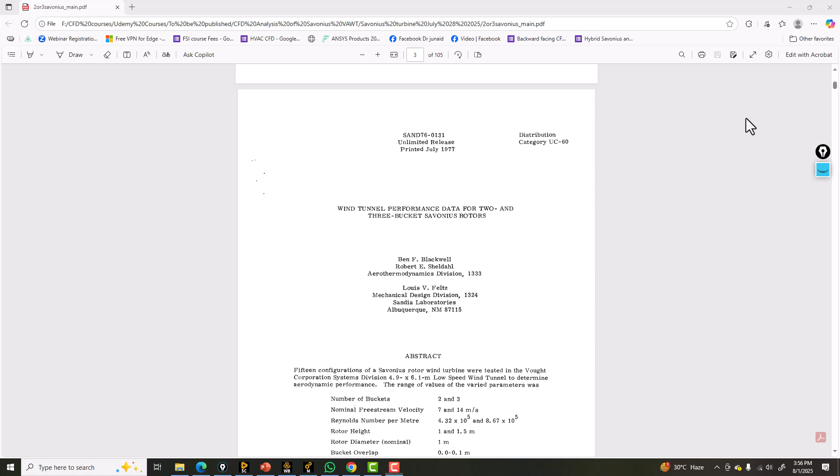For the Savonius turbine that we are going to consider here, the dimensions are given here and they are taken from Blackwell et al. And you can see the report: Wind tunnel performance data for 2 and 3 bucket Savonius rotors. And if you go through all this information, you can see the speed is 7 and 14 meters per second, and rotor diameter is 1 meter, not exactly 1 meter, and the bucket overlap is 0.0 to 0.1 meters.

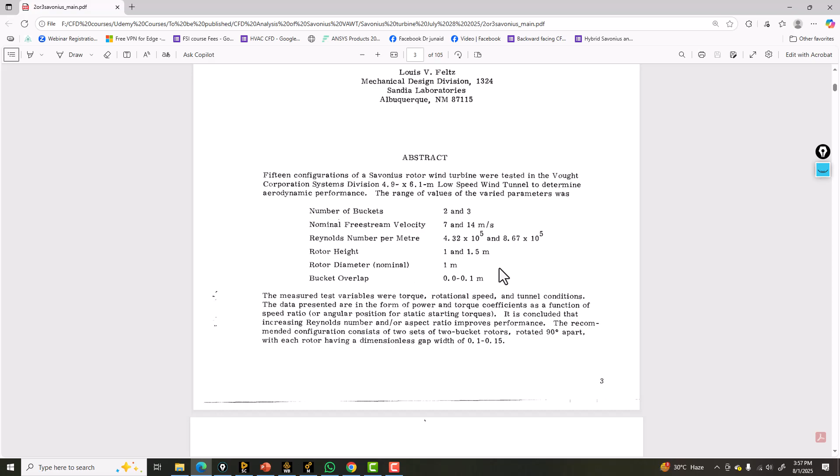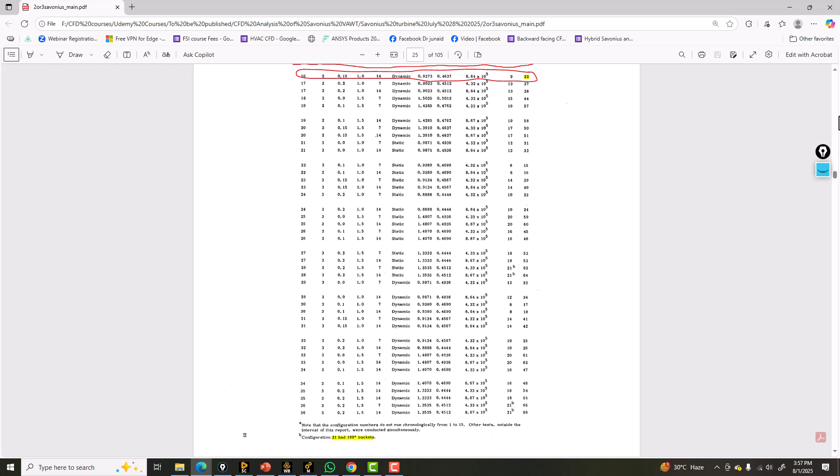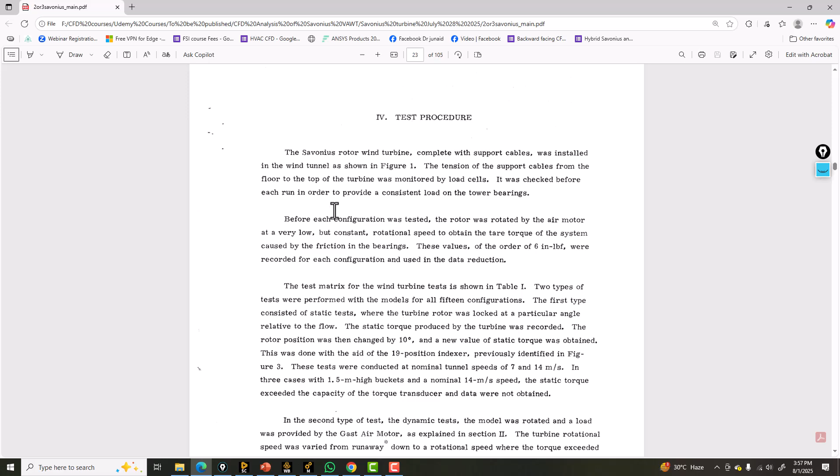Okay, so let's go to more details here. Here is the picture that I was showing you in the previous slides, and the data that we are using is given here. So test number, it's figure number 16, the run number is 21, 22, and configuration number is 9. And the gap S by D ratio or overlap ratio is 0.15. Height is 1.0 meters. We are not taking the height right now because it's a 2D case.

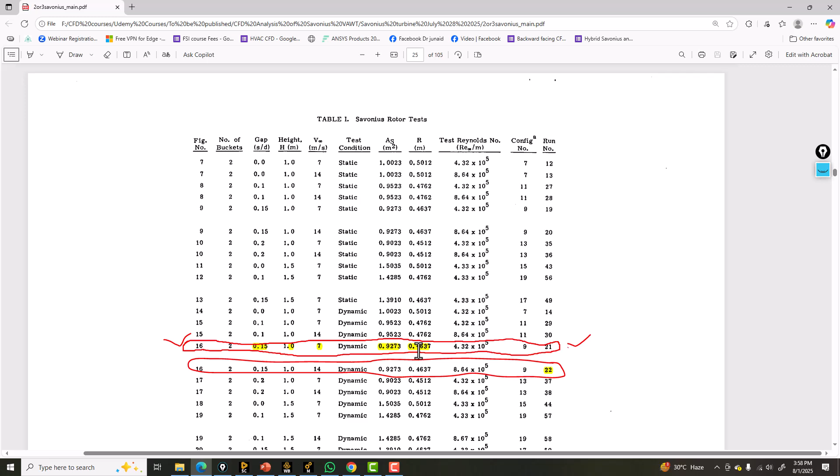And velocity we are going to consider is 7 meters per second, and the area is 0.9273. It means that the area for the Savonius turbine is diameter into height. So if the height is 1 meter, the diameter would be 0.9273 meters, or 927.3 millimeters. And the radius would be the half value, and Reynolds number is given here.

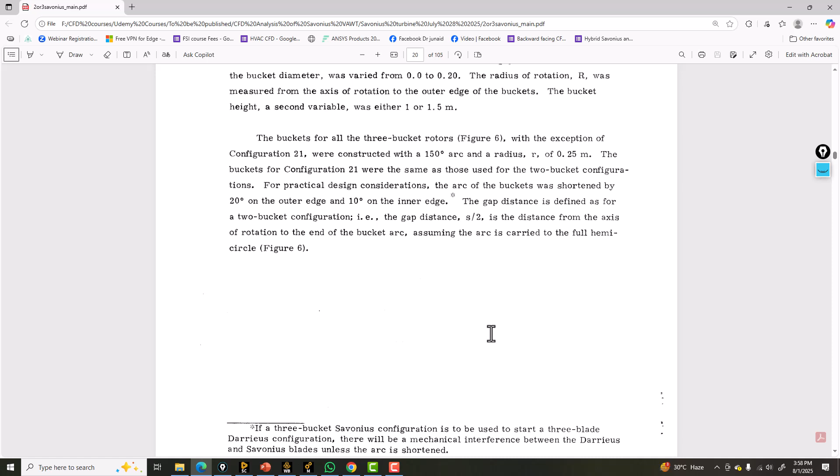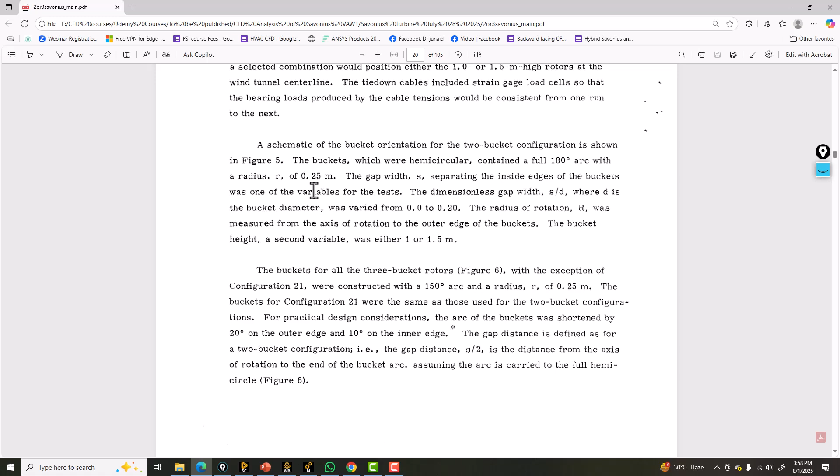And similarly, for this turbine, they have also provided the bucket diameter, and they have emphasized that the bucket diameter is 0.5 meters, that you can see here. So the bucket has a radius of 0.25 meters or 0.5 meters diameter. Okay. So same data is given here. The rotor diameter, that is the overall diameter of the Savonius turbine, is 927.3 millimeters.

Height is 1 meter. We are not using it, and so the aspect ratio, that is H by D, is 1.078. Bucket or blade diameter, semicircular blades, they have the diameter of 0.5 meters or 500 millimeters. And overlap or the gap is 75 millimeters, that is coming from the overlap ratio S by D of 0.15. So you can go either way, but the best way would be to define the overlap ratio, put the value of diameter, and find out the overlap distance.

And the blade thickness, if you take into consideration the diameter of this whole turbine, that is 927.3, a gap of 75 millimeters, and bucket diameter of 500 millimeters, then the thickness of the blades would be 1.15 millimeters, and incoming velocity is 7 meters per second, and there are no end plates.

So now to start the project, I am going to open Workbench, and from here I am going to put Fluid Flow (Fluent), and it contains multiple options for geometry, mesh, Fluent setup and solution. And if required, you can also go to CFD-Post. So first of all, double click on the geometry, and it should open your DesignModeler. If not, then you have to go to the Tools menu and set the default geometry editor, or you can right click here and open the geometry in DesignModeler.

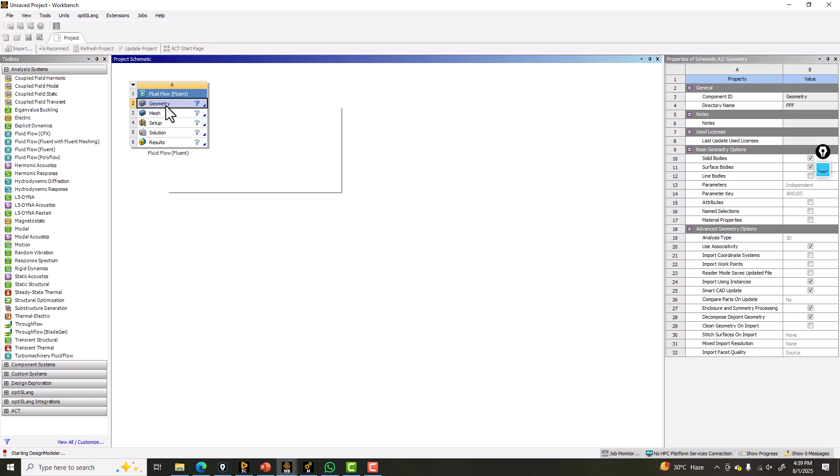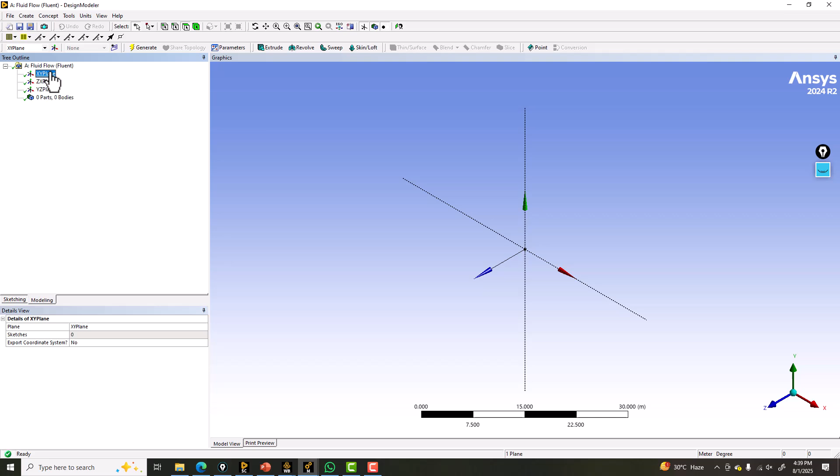So three options will appear. I will show you. If you right click here, you can open either DesignModeler or SpaceClaim or even Discovery. Okay, so first we are going to draw the rotor blades and then the domains: the inner domain, the wake domain, and the outer fixed domain that is going to provide you the boundary conditions.

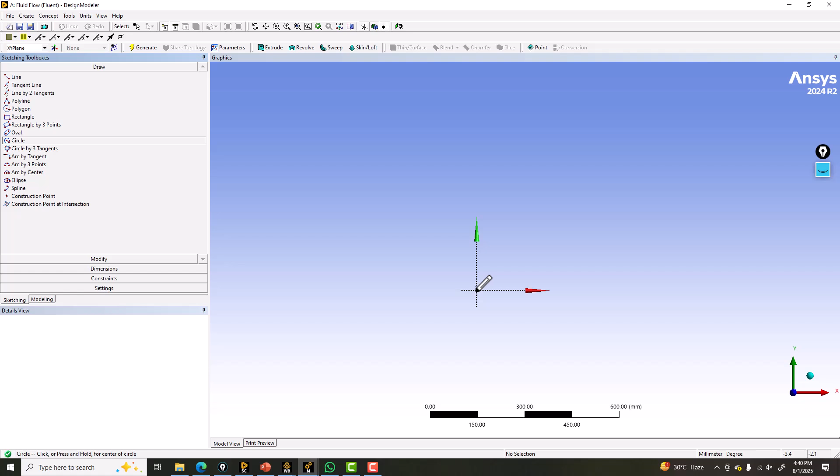Okay, so we are going to take the units as millimeters, and zoom your geometry scale here as per requirement. So our diameter is 927.3 millimeters. So take a scale of around 1000, go to sketching mode, and from here click on the circle and click on the center point, and you should see the symbol P. Okay, and draw one circle. Now for the dimensions, click on the circle here, and the diameter of the outer circle of the Savonius turbine is 927.3 millimeters.

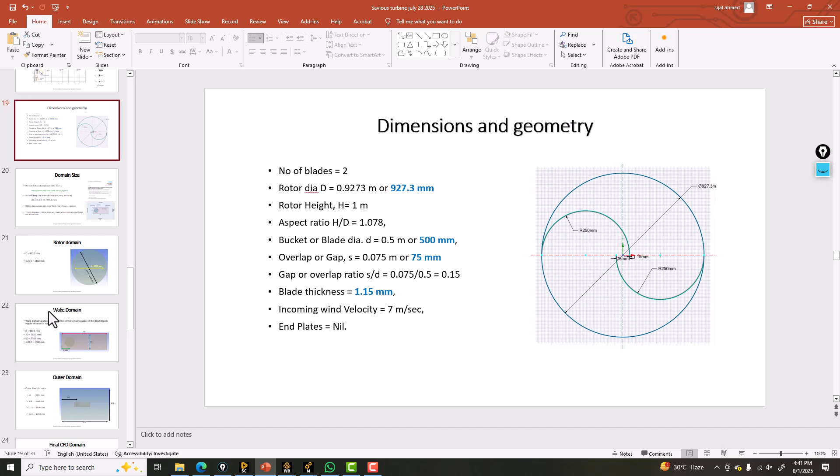Okay, now I'm going to draw. Let me give you some idea here. Here you can see that we have one blade that's returning and one blade that is advancing. So if the wind is coming from there, you can imagine that the direction of rotation would be anti-clockwise. If the blades were flipped, the direction of rotation would be clockwise. Okay, so right now it's anti-clockwise, and the same thing we are going to implement.

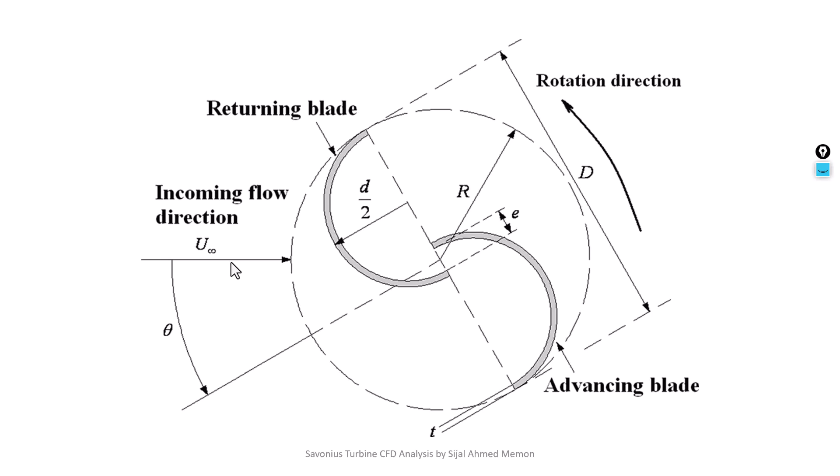Okay, so now we have to make one circle for the bucket. So where should this point be placed? If I draw a circle here somewhere, this will be the second blade. The first blade is actually a returning blade. If you want anti-clockwise, it should be on the top side, and the advancing blade should be on the bottom side. So let's try from here this way.

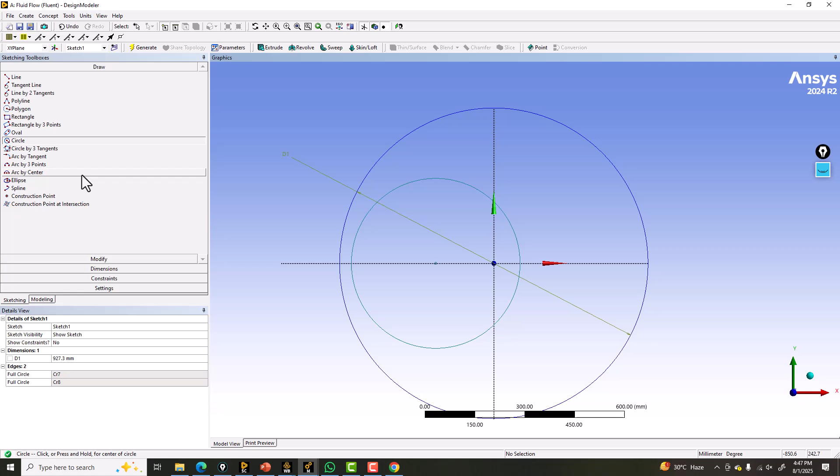Okay, so now this is going to be my returning blade, and the blade on this side will be the advancing blade. If you rotate the geometry slightly, you will understand very well. And here I would put the dimensions about the center of the circle, and where should this center be placed? Let me tell you.

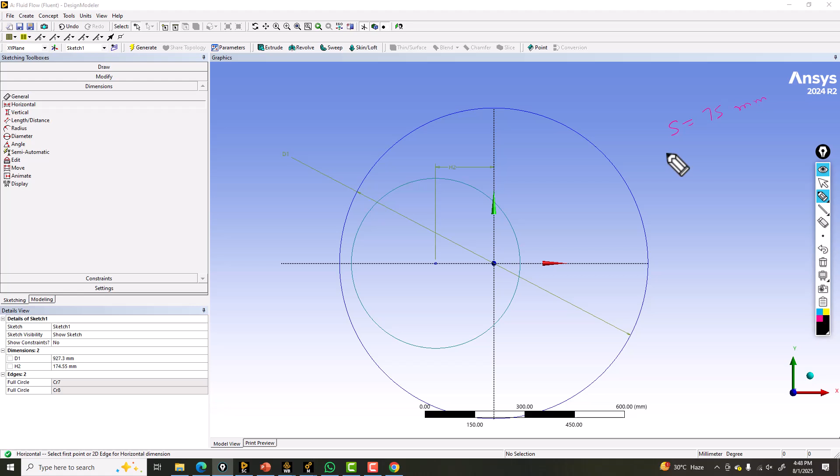See, from the definition of the spacing, that is 75 millimeters, and this is coming from the overlap ratio of 0.15. Now 75 means that the half would be, so this is going to be 37.